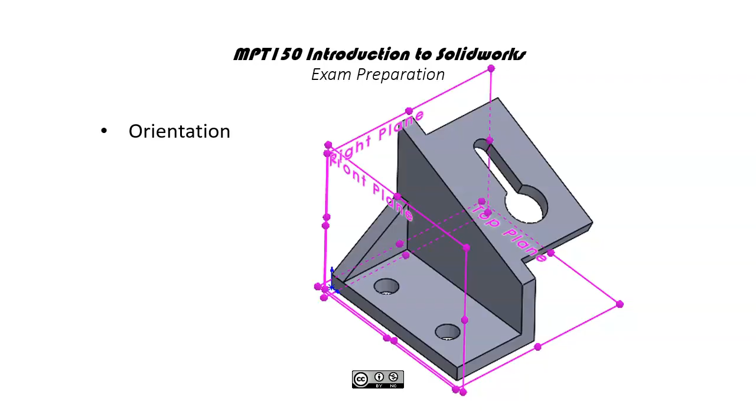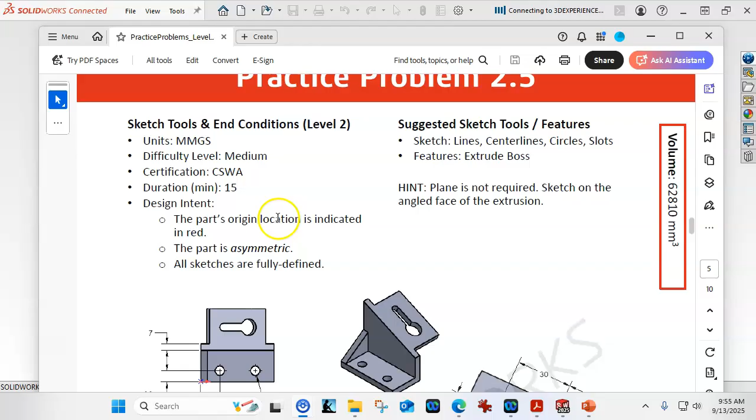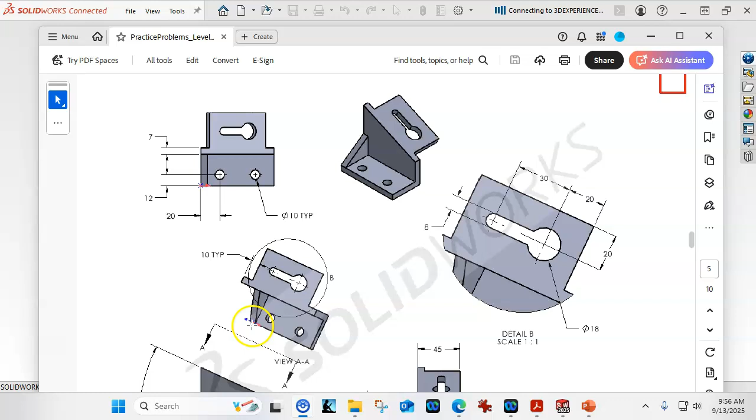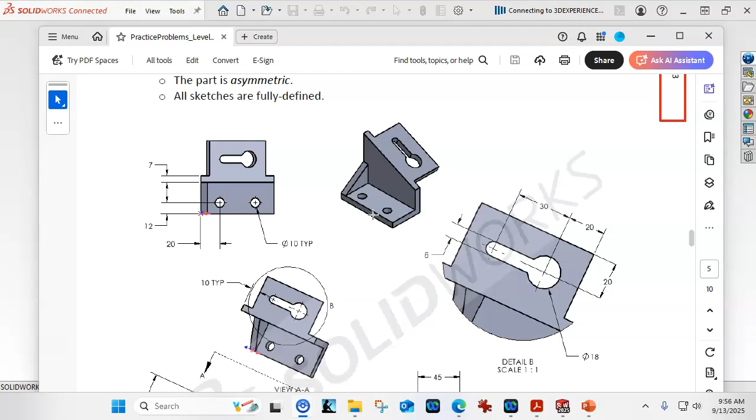Moving on to problem 2.5. We're still in millimeters, medium difficulty. Origin is located as indicated, asymmetric. Sketches are fully defined, with lines, circles, and slots, so we'll be introducing slots. Plane is not required. With the origin being on this edge, assuming it's at that lower corner, that's going to drive our first piece of geometry along this face. So again, front plane, top plane, and the right plane is going to be along this backside. Dimension-wise there's not anything too crazy here, so let's go ahead and start building our geometry.

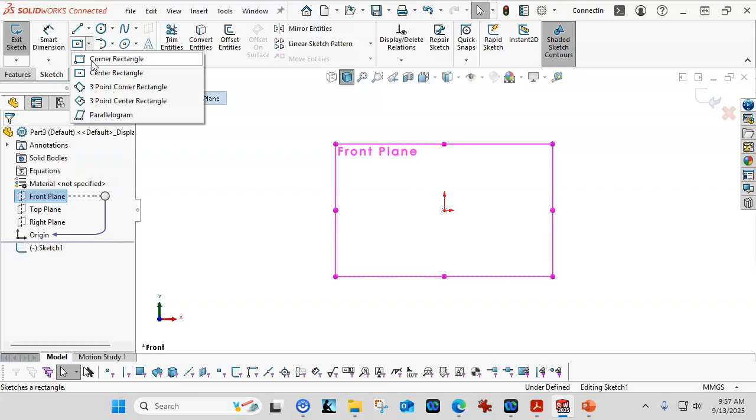We have an overall of 41, so a rectangle 41 will give us a good start. New part, millimeters, we're going into the front plane. We just need a regular corner rectangle. The last couple of projects where we used the rectangle were center rectangles, so we're going to switch back to corner, and I'm just looking for that relation to the origin.

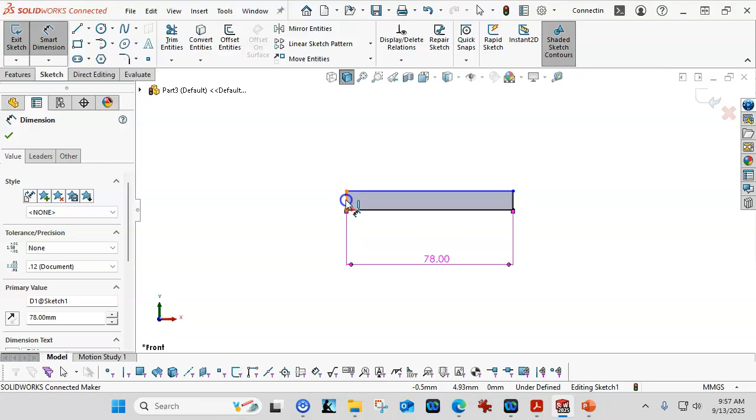We're going to drag that out. It is 78, so we'll get a little closer. Smart dimension, 78 with a height, and it's saying 7 typical on the thickness, so we'll place 7. And then we're going to extrude.

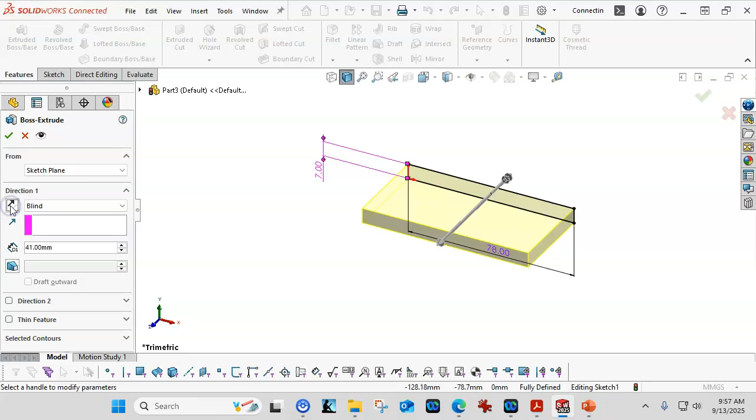I do want it moving away from me, so we're going to extrude in that direction. Keep in mind I can drag the arrow, but I can also just hit the toggle button and reverse the direction of that geometry.

So the 25 goes to the outside edge. Let's drag this back in real quick and make sure I know what I'm looking at. So on this back face, the 41 was the overall.

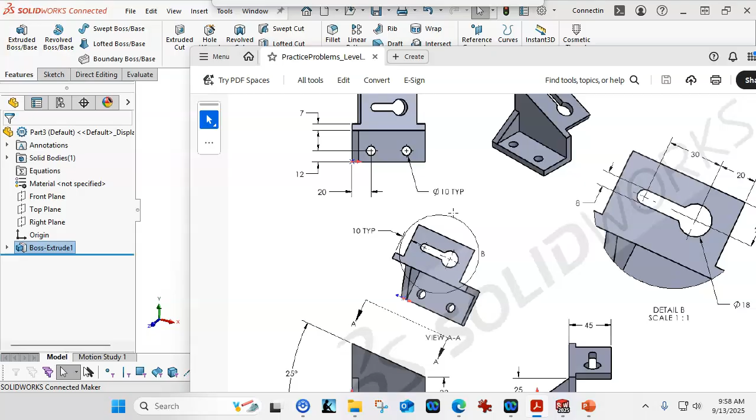If I open up a sketch on the back face of the boss I just created, I can create this kind of triangular shape. Rotating around, clicking on it, opening up the sketch, but my frame of reference is kind of skewed, so I'm either going to switch back to isometric or the front view so I'm looking at it in the orientation that makes the most sense.

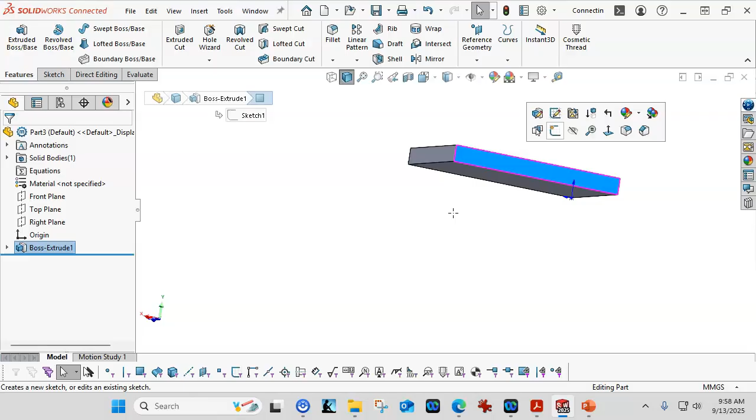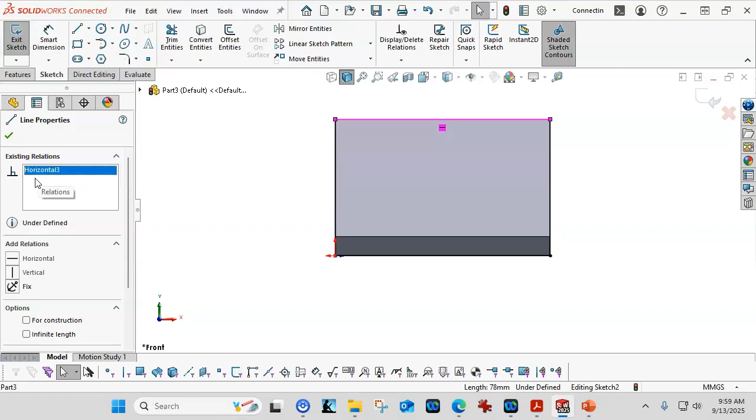This is one of the places where we can use relations to our advantage, in that I can draw another rectangle, and yes, it is automatically parallel, with horizontals and verticals all the way around. I do want to attach that corner by dragging that endpoint and making it coincident. But then we're either going to select that top line and its relation, or select the top line and come over to its existing relations, and hit delete on one of those. What that gives us the ability to do is, rather than drawing all the way around in one shot, I have geometry I can go directly into creating the angle.

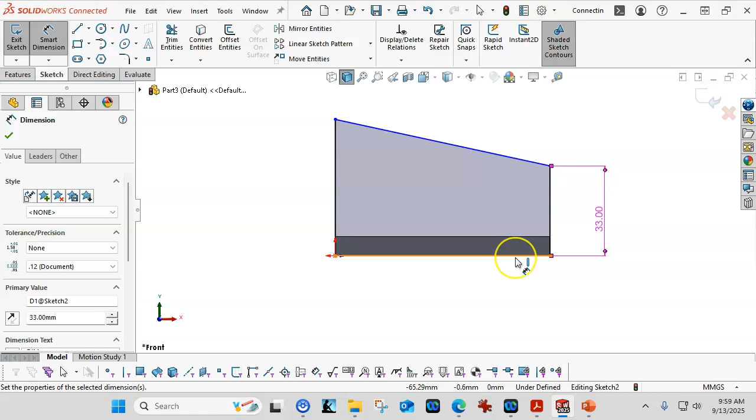So we have 25 degrees. That looks a little steep, but it's all right. And I think that's pretty much all I need for it to be 7 millimeters thick.

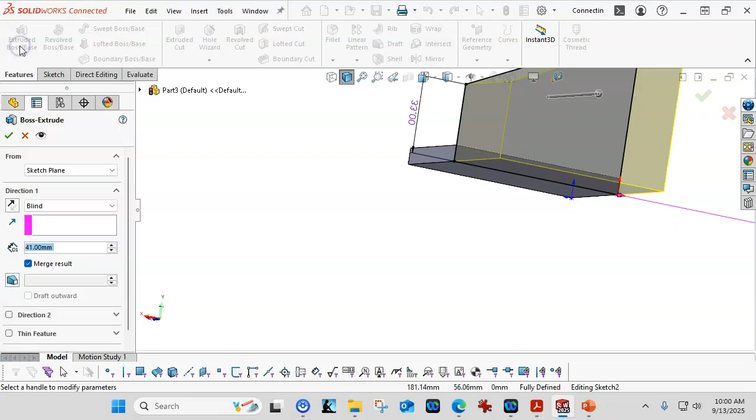So into the features, extrude. After doing all of these contours and regions, it's easy to get into that mindset of looking down here. Notice it's collapsed because this is a continuous region, so there isn't anything there to select.

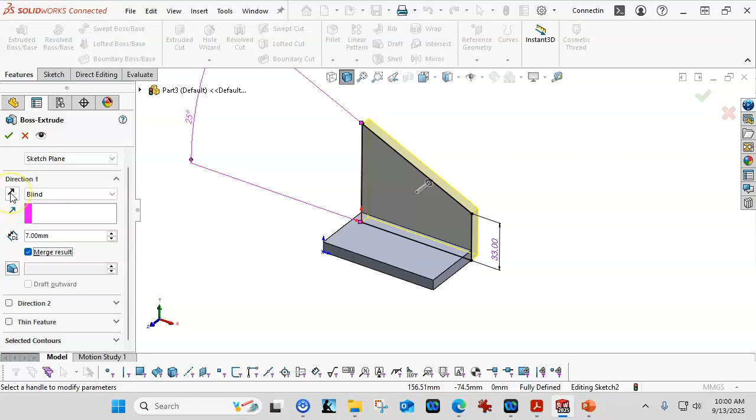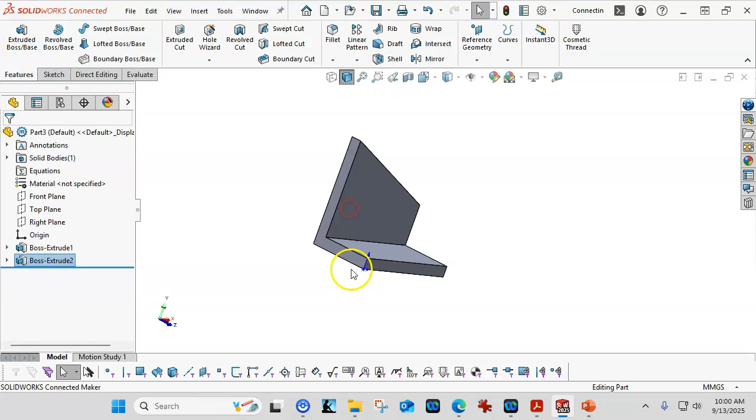I do want to make sure that my direction isn't going that way, so we come over to the toggle and reverse the direction. The overlap, since we're merging these entities, a solid into a solid has no net result on the volume or mass, so it does clean out that geometry. I'm going to go ahead and just do a little placeholder here.

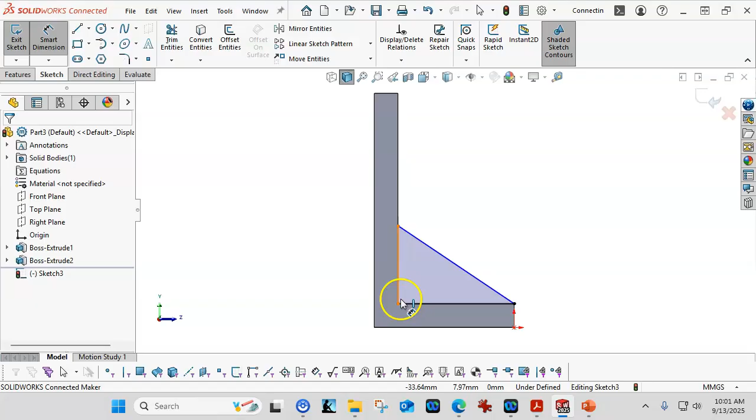For the angle, I am just going to draw the three sides. Right click, go into Smart Dimension, or come up to the Command Manager. And this is also going to be 7 millimeters, and I want to do that middle mouse button rotate so that I'm seeing it come the right direction.

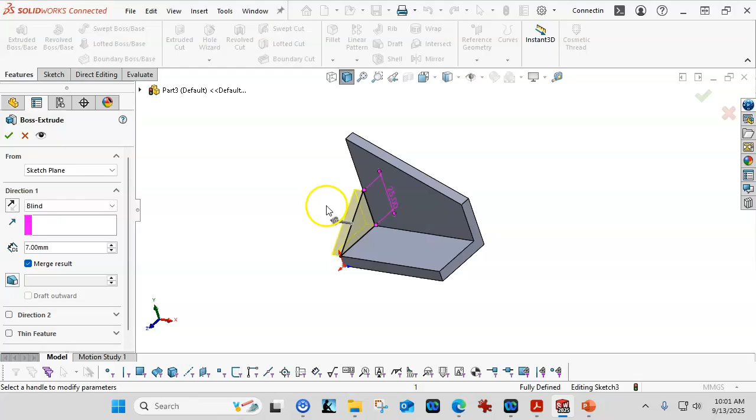This would create a separate body because again we have 0 thickness edges, so it's not going to be able to merge those going in that direction. It's automatically going to create a second body, so let's reverse it so the merge actually takes place and gets it into location. All right, so far so good.

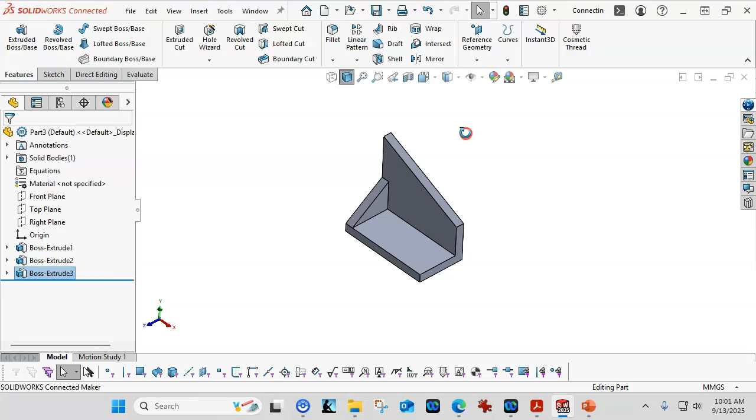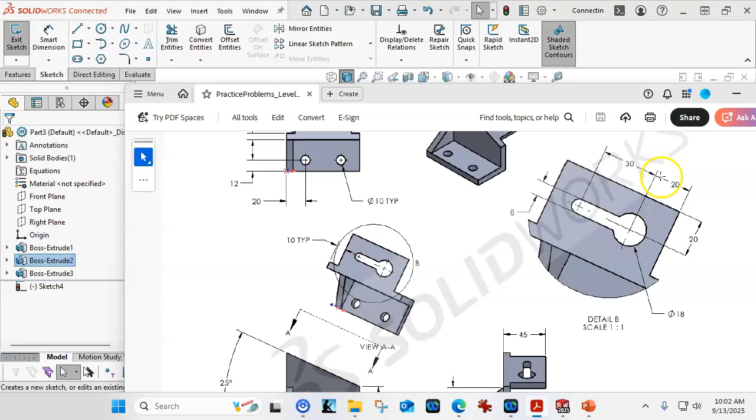We are going to come back to this one and see if we can do the rib function, which we don't get a chance to do very often, so when I can illustrate it, I do take advantage of that. So the sketch then, and this is a partial. We need to take a look at this because in the auxiliary view, it's 10 off of the edge, and then we have our geometry somewhere around 45 overall.

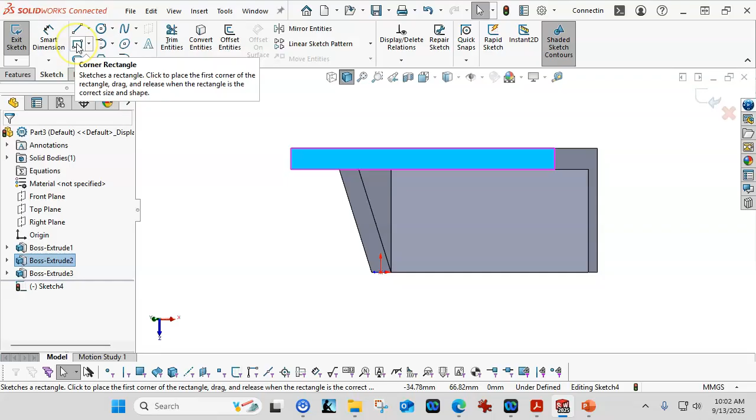So I am looking at generating all of that. So 10 typical, I'm going to take that to mean off of both ends. So we open up the sketch, and we're going to go ahead and include the outside.

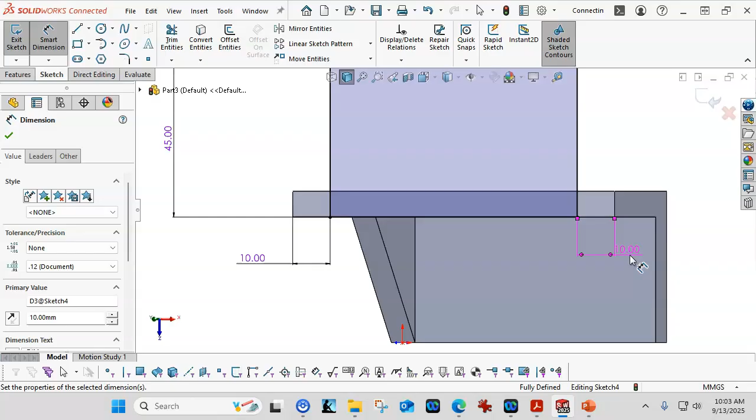All right, so I have that overlap, so when I dimension this, since it was 45, I can go directly to that geometry. And again, it doesn't hurt, well it does help in that I can do that one dimension. So from the edge, that did get the midpoint. It doesn't appear to have done anything too strange, so we'll go ahead and leave it. Sometimes the midpoints do have some unexpected results.

So our keyway is going to use the straight slot, and we have the option between a center point, and the straight is just going to be point to end point. So we pick the first point, we pick the second point, and then we pull the slot out, and that gives us our geometry.

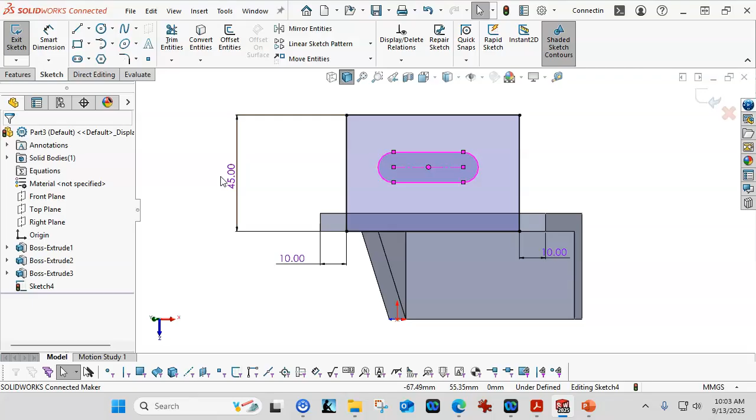All right, so it is centered maybe. Oh, there it is, the 20. So we're going to come from that center line over to the edge, 20. We have a dimension of 8. All right, if I pick the radius or pick the arc, then I have to account for the radius. If I just go line to line, then I'm reproducing pretty close to what's in the geometry.

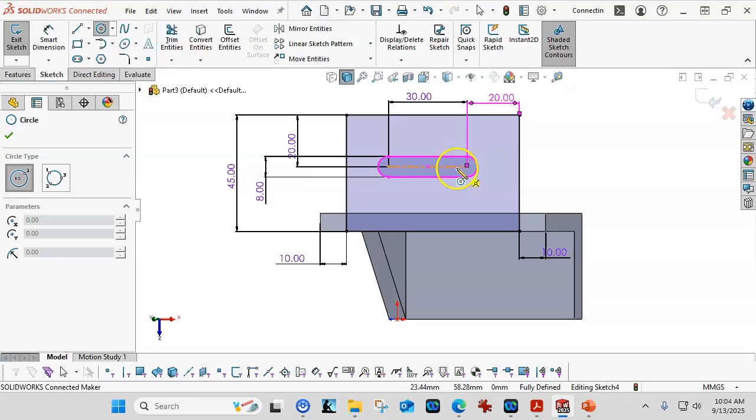All right, we're going to go 20, and that gets me to position. And then our circle is a diameter of 18.

All right, and even though this is going to show up as a contour and region, we're not going to have to worry about picking any of that geometry as a cut because it's all included. If I'd done this as a separate sketch, then I would have to pick a few more items in that geometry.

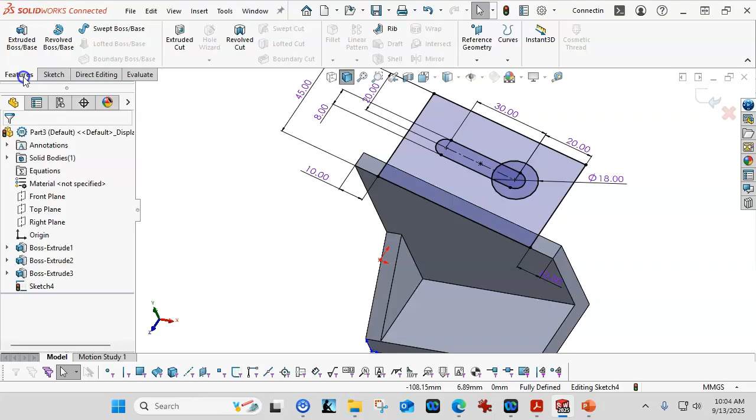So let's go ahead and set this up for the extrude, and it is showing coming towards us. We're going to reverse that, and the 7 millimeters going that way, and we'll go ahead and select.

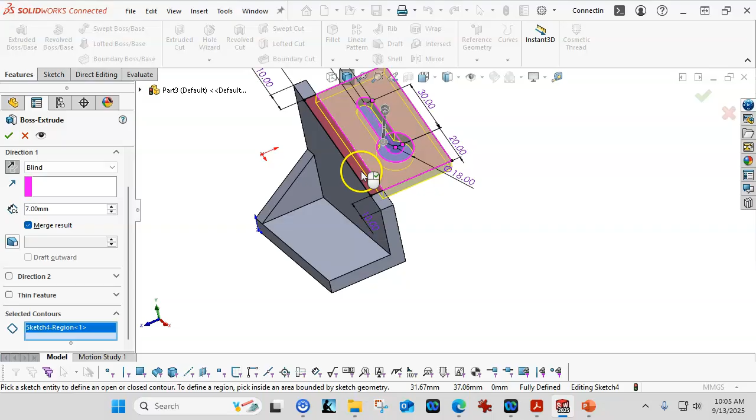That does have a self-intersecting, so yeah, I do need to pick the region. Notice it picked the edge of the extrude. It's not a big deal. If I really wanted to, I could pick the other edge, but that's enough geometry to tie it together.

All right, so let's go ahead and save this as our 2-5, and then our value for the mass properties, we have 62,810, and I'm at 63,909.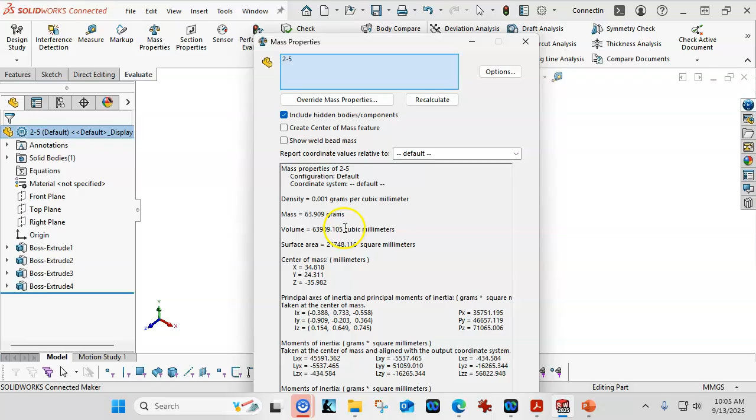All right, so another fun one. Oh, there we go, I missed two holes. So easy to overlook. Let's go ahead and drop those in real quick.

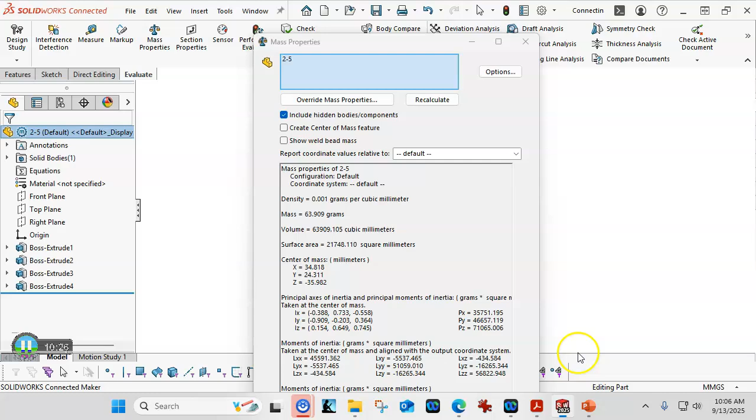And my moments are still showing up, so somewhere I managed, there it goes. Somewhere I managed to click out of my mass properties and leave that open. So let's get those last two holes in there.

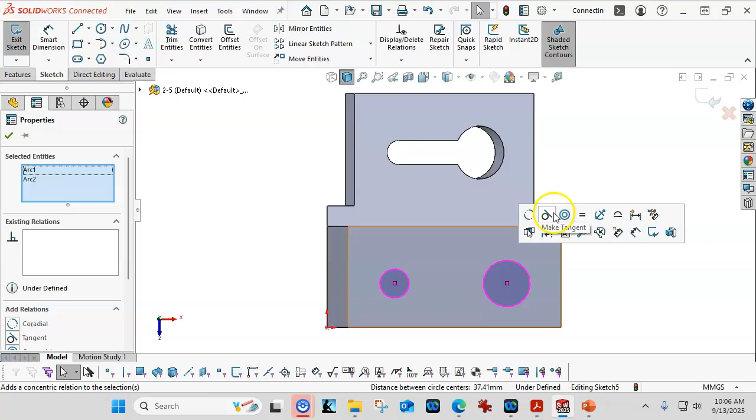Just open up the sketch, draw a couple circles, make the centers horizontal, the two outsides equal, and diameter of 10. And off of the outside edge.

So I am going to suppress that one, or at least try to, and hopefully it won't mess with that too much. And we have the 20 millimeters, and it did not give me a typical, and it does not give me a center to center. So we're going to try the 20 millimeters, and then we'll go...

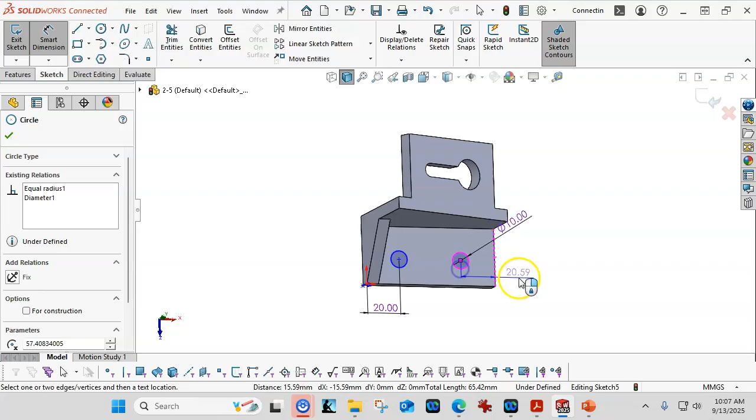Oops, missed, so we'll just reapply it. And from the bottom edge, we can go 12. All right, and that's just a feature, extrude cut, and through all or up to next.

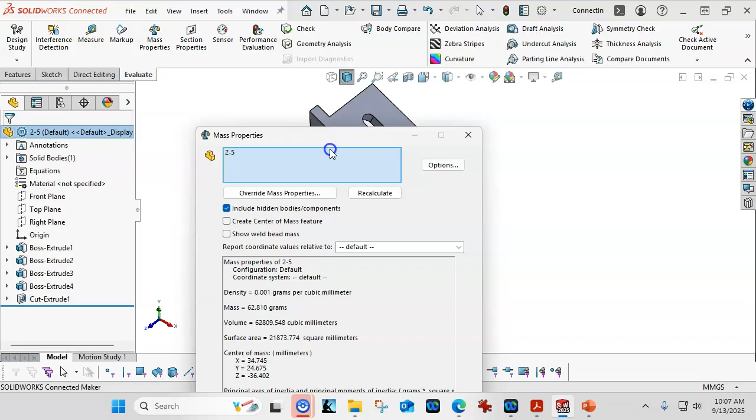And let's see if that got us a little bit closer. Mass properties. All right, 62809.5. All right, we'll take that as a round up and say we're pretty darn close on that one.

All right, so one more save. And let's go back to Boss Extrude 3. One of the things we're going to use with the dynamic reference, if I can move that out of the way, is it's tied to these other shapes.

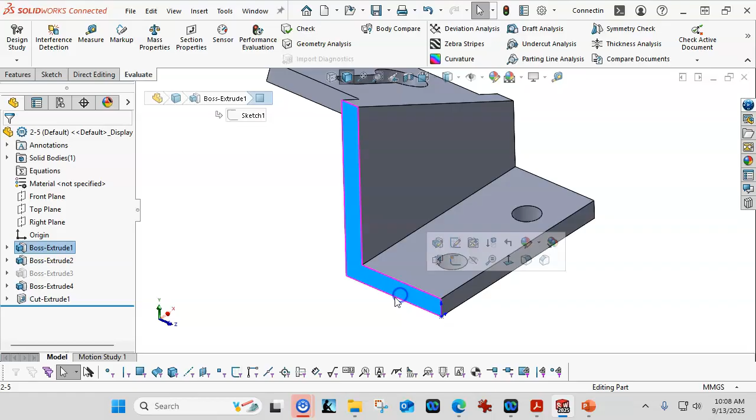All right, so it's been a while since I've done rib, so I'll see how much trouble I can get myself into here. We're going to draw the shape. Nice thing is that it doesn't always have to be complete, but I do need that dimension in there for it, and relations for it to tie together.

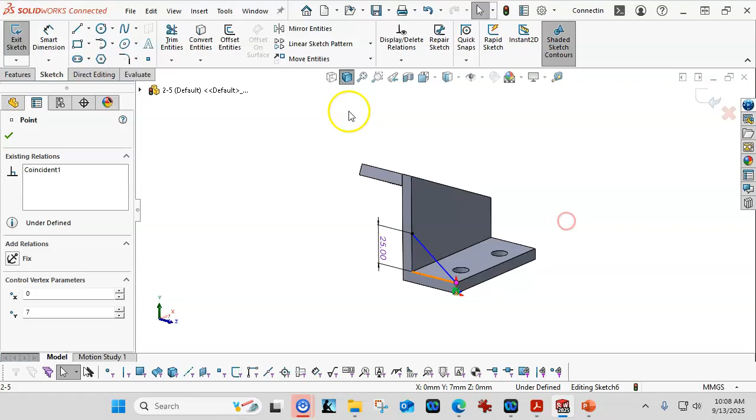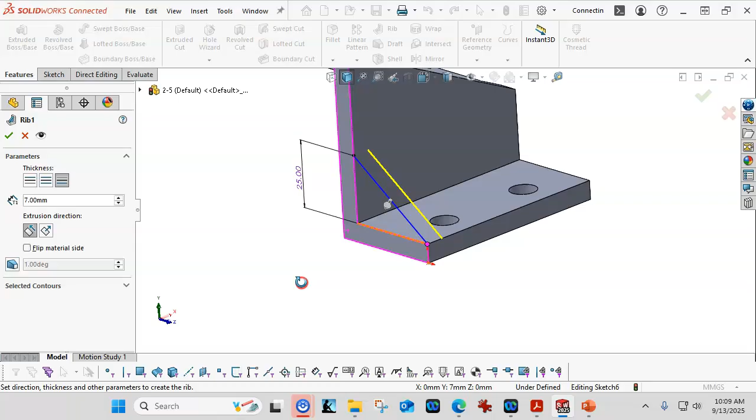All right, so over in the features, we're going to look for the rib, and it's going to default to a midplane. If we go to the outside or to the inside, then 7. And again, we have one of those little arrows that is pointing it. That's an interesting shade. We have one of those little arrows pointing in the direction that it's going to go. And we're going to see what happens when we click OK.

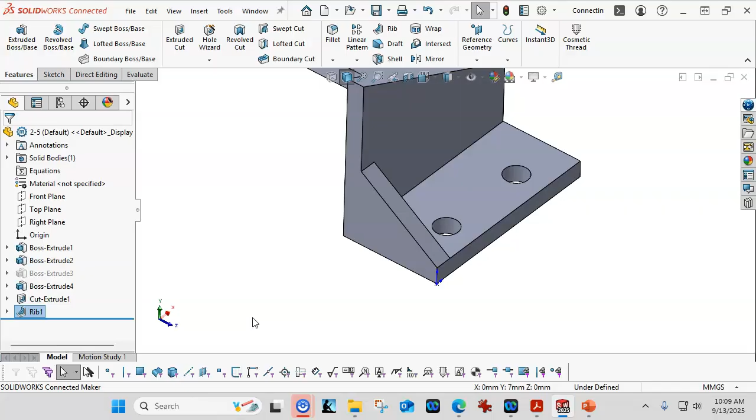Is it easier? No, but it's kind of cool. I think some of the plastic injection models will probably use one, maybe an ice tray coming up or something. We'll use the rib more directly in the future, but it is an alternative mechanism to create our geometry.